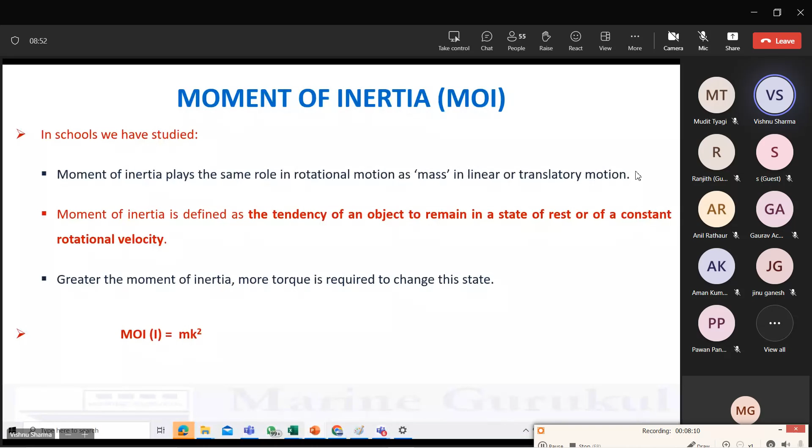Okay, so basically we have studied this moment of inertia in schools also. In schools, we studied moment of inertia as mk square, where k was the radius of gyration, if you remember. In all our working, we will represent moment of inertia mostly by capital I and sometimes by small i. So whether it is capital I or small i, both represent moment of inertia—don't get confused. But this was the moment of inertia of mass.

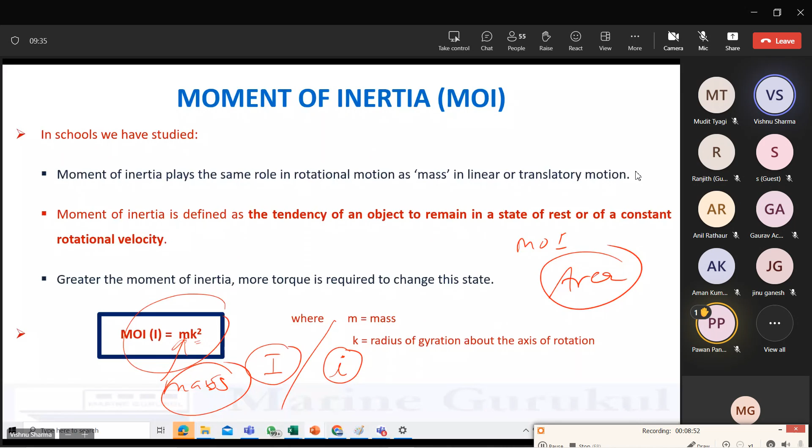In our topic today, we are not going to talk about moment of inertia of mass. We are going to talk about moment of inertia of area. As far as our context is concerned, moment of inertia refers to the second moment of area. First moment I explained a while back; second moment of area is referred to as moment of inertia as far as our topic is concerned. So you should not be confused—in school I studied mk square, why is m missing now? That was moment of inertia of mass; this is moment of inertia of area. That should put your doubt to rest.

Every time we talk of moment of inertia, please ask yourself two questions. Moment of inertia of which area are you talking about? Every time we can't write everything, but I must keep asking myself these questions. Moment of inertia of which area? Because unless I know which area I'm talking about, I can't talk about moment of inertia. Second, I must know: about which axis? If I do not know either of these two things, or both, I cannot get the moment of inertia, and I cannot answer any question related to it.

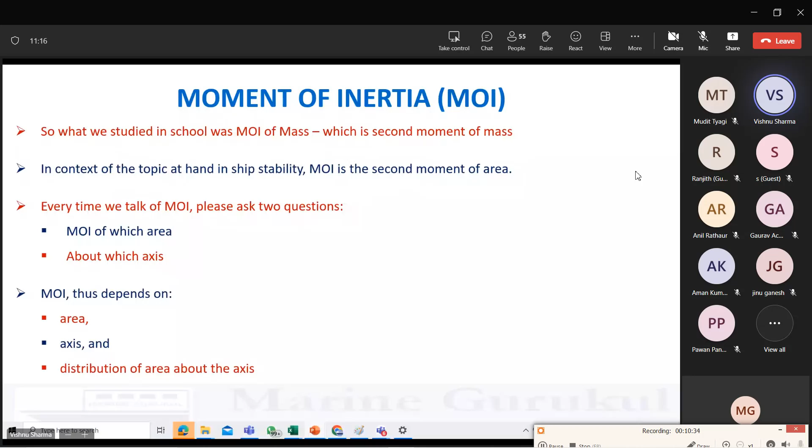Thus, moment of inertia will depend upon the area in question, the choice of the axis, and with respect to the axis, how the area is distributed. Okay, you may have this area—let us say this area is 10 square meters.

This area is also 10 square meters, but one is a square, the other is a rectangle. Let's say this is the axis about which I want the moment of inertia, y, for the area represented by the red one. Now I change the shape to a rectangle, retaining the area at 10 square meters. The axis is same, the amount of area is same, but the distribution of the area in the blue one is different from the distribution in the red one about y. Therefore, in both cases, moment of inertia shall be different.

And that is what I mean by the third point. Is the third point clear, guys? Distribution of area about the axis. Clear? Any questions until now? If anybody has any doubts, please clarify.

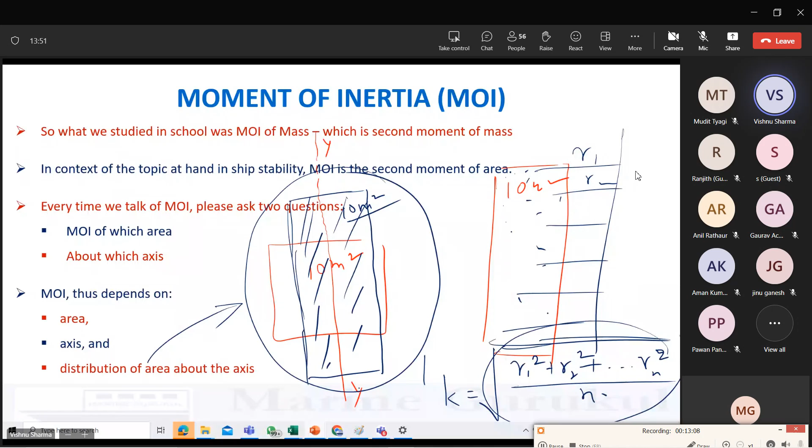Just to tell you, radius of gyration is not the distance of the centroid from the axis. That should not be in your mind. Is that clear? Okay, that is good enough. I can prove this to you, but there's no point, we don't have to spend time on that. As long as this expression gives you an idea that radius of gyration is not same as the distance of the geometric center from the axis, right?

Now we come to the regular geometric shapes, these formulae. You will automatically pick them up as you use them in the questions. Whatever PDF I sent you yesterday, you are free to refer to it while doing the questions. And if you don't learn them by the end of the assignment, please spend 15 minutes to learn the formulae if the need arises.

We need to recall the use of formulae for moment of inertia of regular geometric shapes, which we did in school, some of them we even derived. The regular geometric shapes we are going to use are rectangle, triangle, circle, semicircle, and quadrant, that is 1/4 of a circle. These are the shapes we are going to use in our working, and these are the formulae I sent you yesterday.

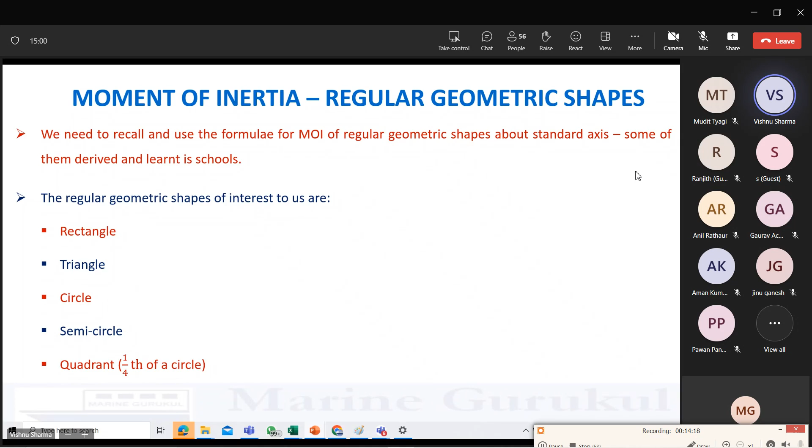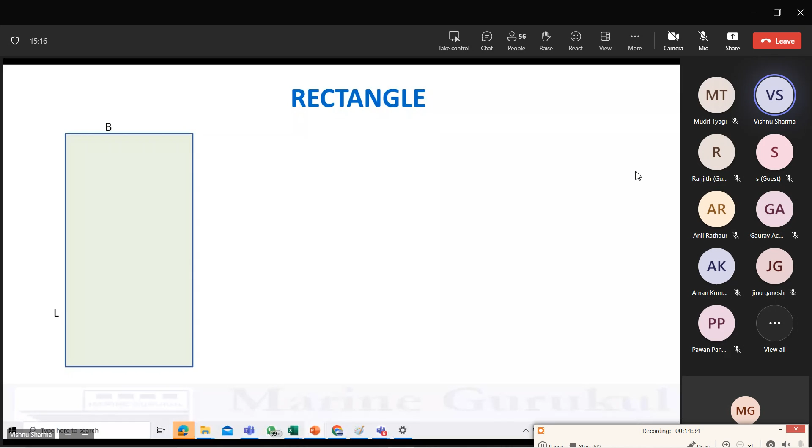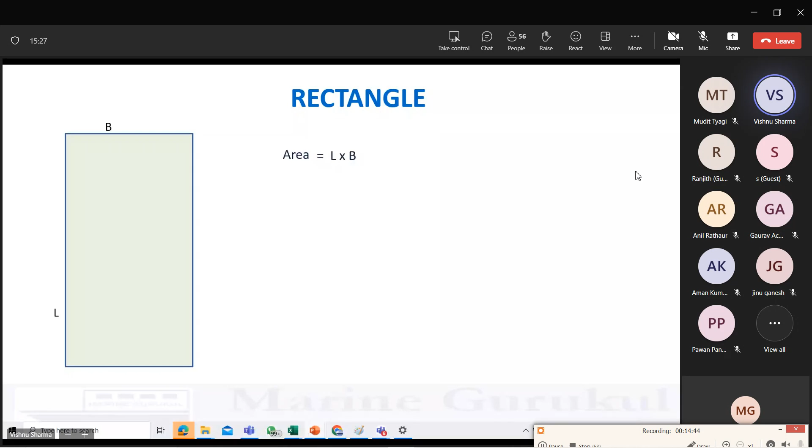Let's start with the rectangle. We know what a rectangle is, we don't have to spend time on that. Let the length of the rectangle be capital L and the breadth be capital B. First, we must know the formula for area: area of a rectangle is L into B. Then we identify its geometric center, the centroid. Centroid will be the intersection of the diagonals. This is one diagonal, this is the other diagonal, and where the two diagonals intersect is the geometric center of this rectangle.

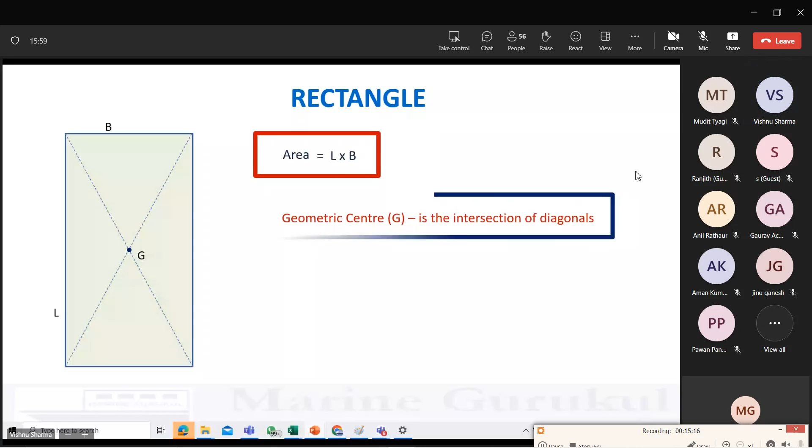Now we will learn some standard formulae. When I say standard formulae, please be careful to remember which shape, which axis. There are two standard formulae you need to learn for rectangle, for moment of inertia. One is about this axis, which I've called the x-axis. You can name it whatever you want. This axis passes through G, the geometric center, and is parallel to side L. So x-axis is an axis that passes through the geometric center of the rectangle and is parallel to the side L. The moment of inertia about the x-axis, represented as I-x-axis,

is given by this formula: L times B cubed, divided by 12. Length into cube of the breadth, divided by 12. See what I have written here, this represents the axis about which you're talking about the moment of inertia. Another axis we need to learn about is this one, YY. Now, I-YY will be B times L cubed, divided by 12.

How do you remember which side to cube? You cube the side which is cut by the axis. Here B was cut by the axis, so B cube. YY is cutting L, so it is L cube.

Now what is so special about X and YY? Both are passing through the geometric center. If they don't pass through the geometric center, these formulas will not be valid. So both of them pass through the geometric center and are parallel to one of the sides. X is parallel to length, YY is parallel to breadth, and you cube the side whichever is being cut by the axis.

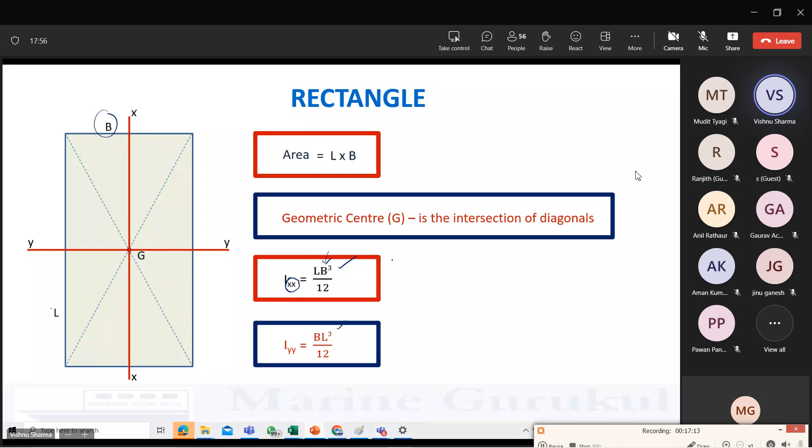This will help you in remembering which one to cube. Is that clear, guys? Yes, sir. Okay.

Next we go to triangle. Now before I start talking of triangle, I want to take a minute to explain something people usually make a mistake about. Guys, the triangle has three sides. And we know the area of the triangle is half base into height.

Now please understand that any of these three sides could be acting as a base. Then which height are we talking about? We are talking about the height which is corresponding to the base in question.

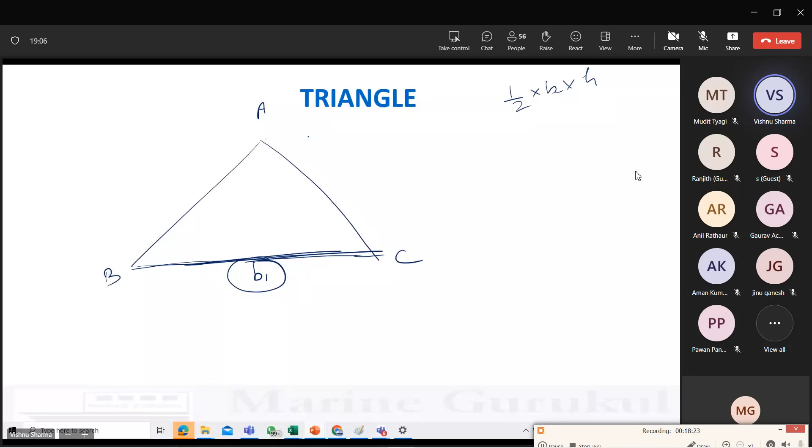For example, if somebody says I am taking this as the base, B1 as the base, then we go to the opposite vertex. Opposite vertex is A. We can draw a parallel side through it, parallel to the base. And the perpendicular distance between these two parallel sides is height 1. H1 corresponds to base 1.

In another scenario, I may be required to use another side as the base. Suppose I need to use this as the base, B2. Which is the vertex opposite to B2? Capital B. Through B, I draw a line parallel to base AC.

And then I drop a perpendicular wherever you can drop. You can measure here also, it doesn't make a difference. This is H2, so height 2 corresponds to base 2. So if you are calculating area, if you are taking B1, you will multiply by H1. If you are taking B2, you will multiply by H2.

And if you're taking the third side as the base, you could be needing any one of them to be taken. So please don't get confused when we start solving questions. If you want to take this as the base, then the perpendicular distance from here, this is height 3.

So is the concept of base and height of a triangle clear to everybody, or does anybody have any question on that? Clear, sir. Okay, so I'll clear this and we go to triangle.

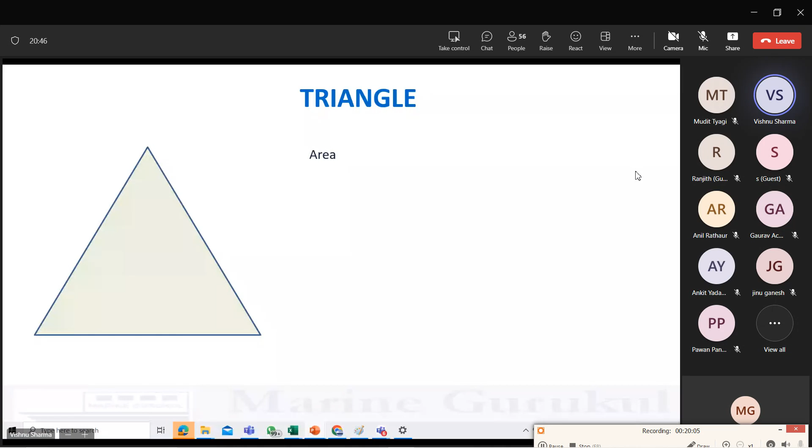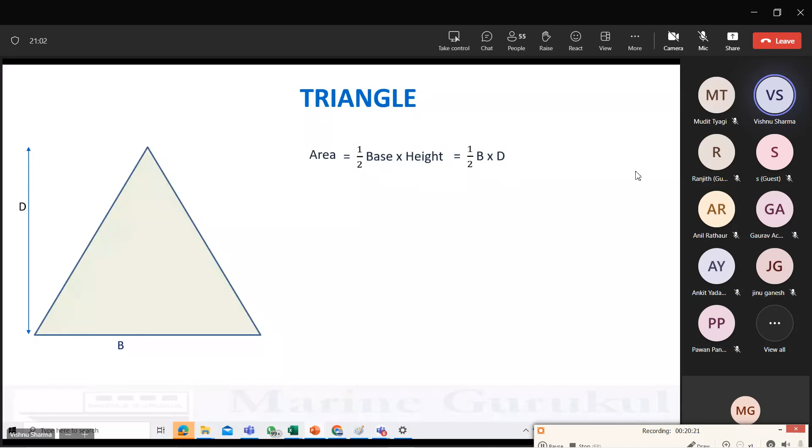Okay, this is the triangle we are talking about. Area of the triangle is half base into height. Now here I have taken B as the base and the height I'm taking as capital D, so it will be half base into the height D. Caution: height being corresponding to the side chosen as the base, which I just explained a while back.

Please make sure that you take appropriate height, appropriate to the base in question. So you cannot just mix it up.

Geometric center of a triangle is the intersection of its medians. What is a median? Median is a straight line joining one vertex to the midpoint of the opposite side. That means if you take A as the vertex, the opposite side is this one, you take its midpoint, you join it with a straight line, that's a median.

Okay, so you draw the three medians. This is one median, this is the second median, and this is the third median. Where the medians intersect, that point is the geometric center of the triangle.

And also, the distance of the geometric center of the triangle is 1/3 of the height from the base and 2/3 of the height from the vertex. So this will be 1/3 D and this will be 2/3 D. Please don't get confused and reverse them.

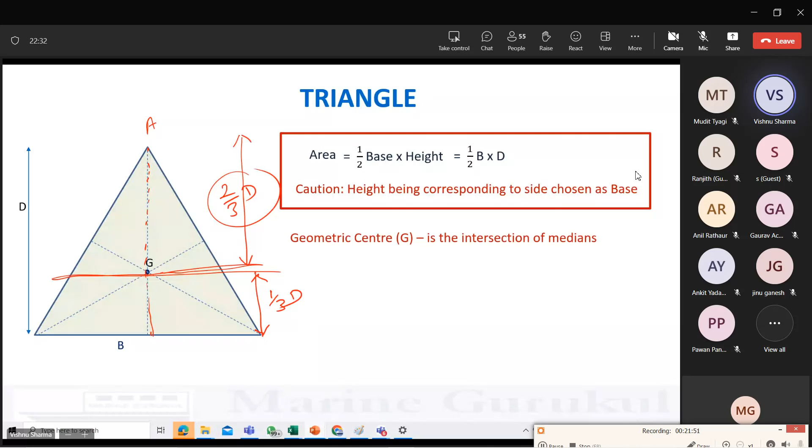The distance of the centroid of a triangle is 1/3 of the height from the base and 2/3 of the height from the vertex. Is that clear? Yes, sir. If the base was different, then it will be 1/3 of the corresponding height and 2/3 of the corresponding height. So you have to be careful between base and height.

Now, in this case, we will learn two formulae. Why now you'll say, sir, why are you learning two formulae for a triangle? Why not only one? Because our questions use them. If you learn one formula extra, that will help us save time when we calculate and do the questions.

So the axis, we need to know about this. Guys, what is so special about the axis that I have drawn, XX? It is passing through G and parallel to base B. XX is an axis passing through the centroid and parallel to base B. And the formula for moment of inertia about this is BD cube upon 36.

B is the base, D is the height. BD cube upon 36 is the formula.

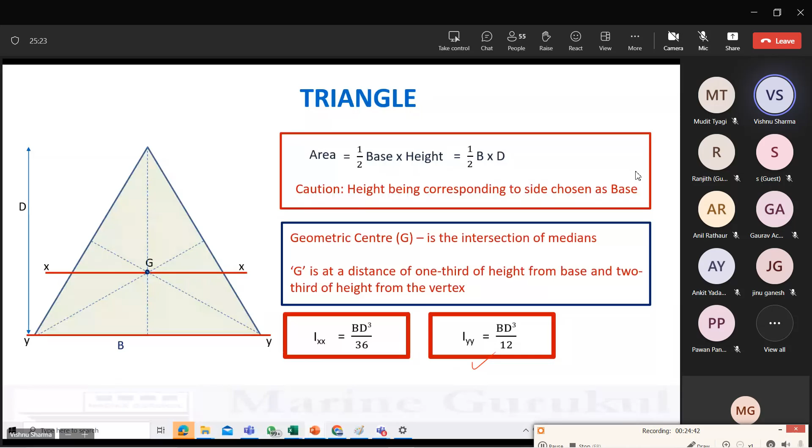Okay, the third we come to is a circle. We all know what a circle is. It has a circumference, it has a diameter, it has a radius, and we know where the center of the circle is. The center - this is the diameter of the circle. Half of it is the radius. All of you know it. And area is pi r square.

In stability, when we take pi, we'll take it as 22/7. We'll not take it as 3.14. We'll take it as 22/7.

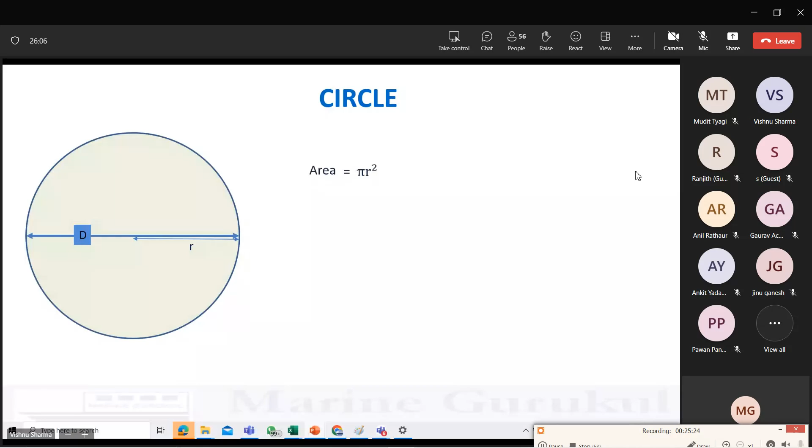Where is the geometric center of a circle? Where all the diameters intersect. If I draw one more diagonal, or another diagonal slanting, they will all meet at this point. That is the center of the circle, G, geometric center, right?

Now we learn about moment of inertia of a circle about this axis, the x-axis. About x-axis, what happens? One semicircle is on one side, another semicircle is on the other side. When you take y, again the area distribution is similar. You have one semicircle on one side of y, another semicircle on the other side.

If I take any other diameter, suppose I take this diameter ZZ. Even for ZZ, on one side you have an area which is a semicircle, and on the other side another semicircle. So whether it is XX, YY, or ZZ, the distribution of the area does not change.

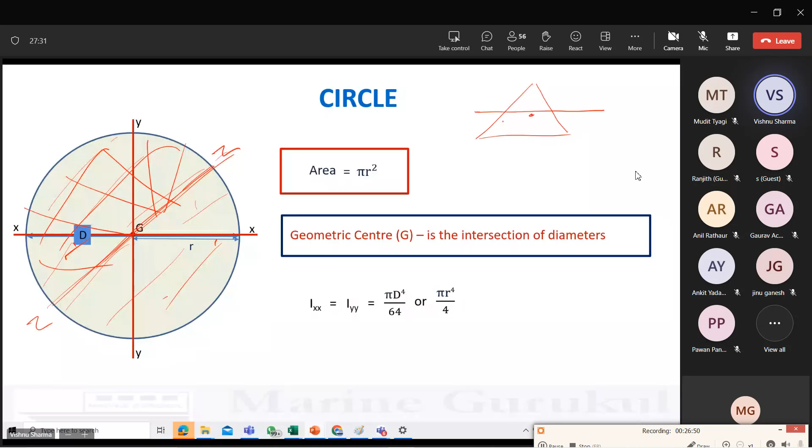Compare it with the triangle a while back. When you took the axis XX, some area was above it, some was below it. When you took YY, everything was on one side of YY. So the distribution changed, and the formula changed. But between XX, YY, and ZZ, the distribution is not changing.

Therefore, it will all be pi d^4/64. If you put d as 2r, it will reduce to pi r^4/4. If both are same, it doesn't matter. So basically, this will be the formula about any diameter - it doesn't make a difference which diameter you are talking about.

So is the formula for circle clear now? But for any diameter of the circle, the formula will be the same. Clear? Clear, guys? Yes, sir. Yes, sir. Yes, sir.

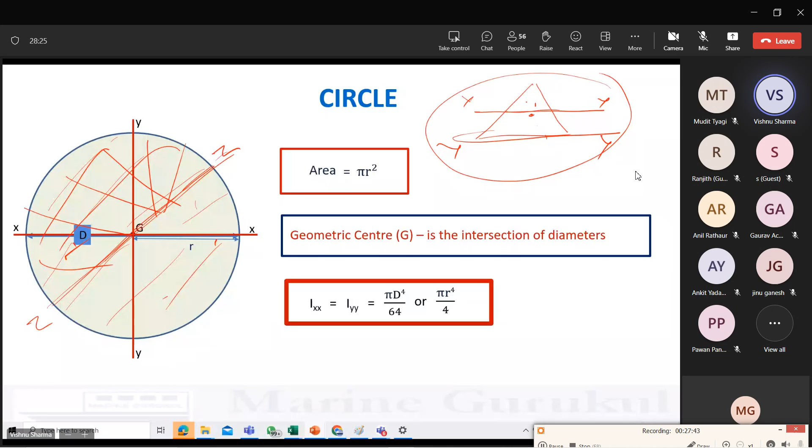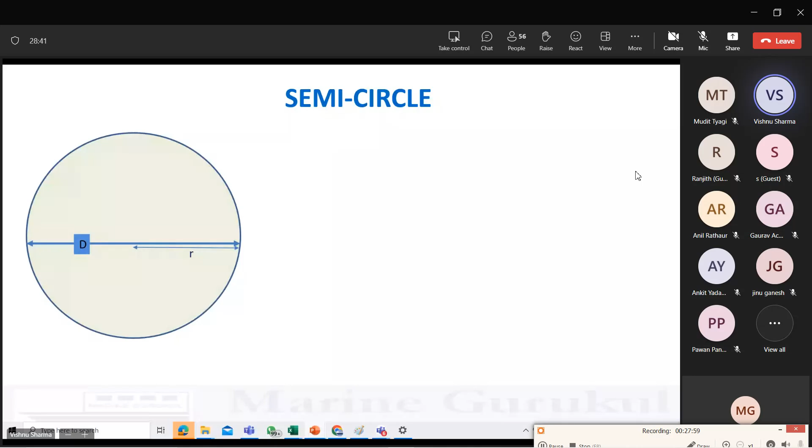Okay, then we come to semicircle. We have just studied about this full circle. We know what was its area, where the geometric center was, and everything. But now, if I remove one half of it, what am I left with? I am now left with a semicircle.

Obviously, the geometric center will not be on the diameter now. But all of you would agree that the geometric center would be on this radius, yes or no? Why? Because you have identical areas on each side of it. Do you agree the geometric center of this semicircle will be on this red line? Yes, sir. This is the radius perpendicular to the diameter of the semicircle, correct?

Okay, area of this will be half of the area of a circle. What was the area of a circle? Pi r square. This will become pi r square by 2.

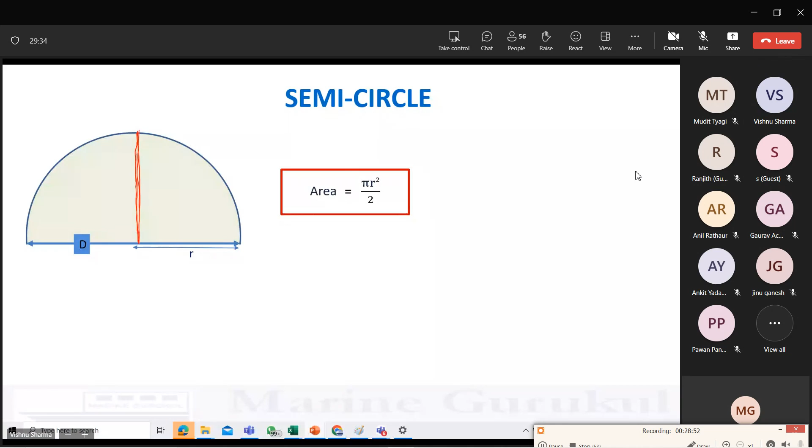Where will be the centroid of it? It will be on a radius perpendicular to the given diameter.

Now, where will be the geometric center? On this red line, the geometric center will be closer to the diameter than the circumference. Why? Because on top, the width is reducing with the curvature. Because of the curve, the width of the area is reducing. The geometric center of this semicircle would be somewhere here.

And this distance is what is given as 4r by 3 pi. That is the distance of the centroid of the semicircle from the diameter. You'll have to learn this formula, 4r by 3 pi.

Let me clear my diagram. This distance is 4r by 3 pi. So if you know the radius, you can get this distance.

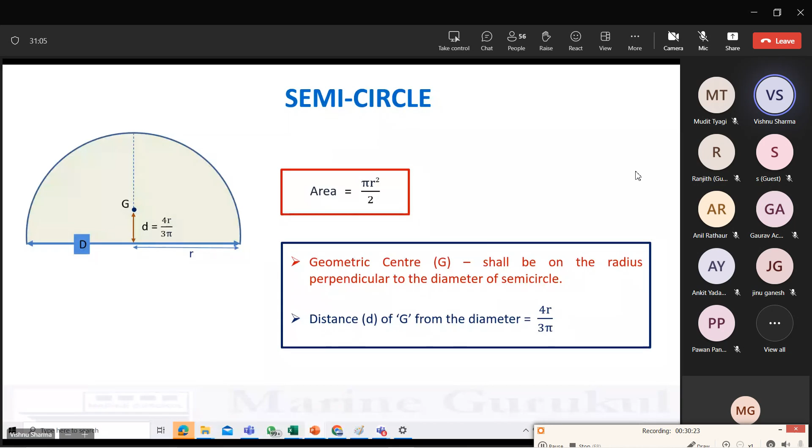Now, which axis are we going to study the moment of inertia about? Again, we'll study about two axes to facilitate simple calculation. One axis every time will be passing through the geometric center, undoubtedly. So one would be through the geometric center, and the second one would be this one, YY.

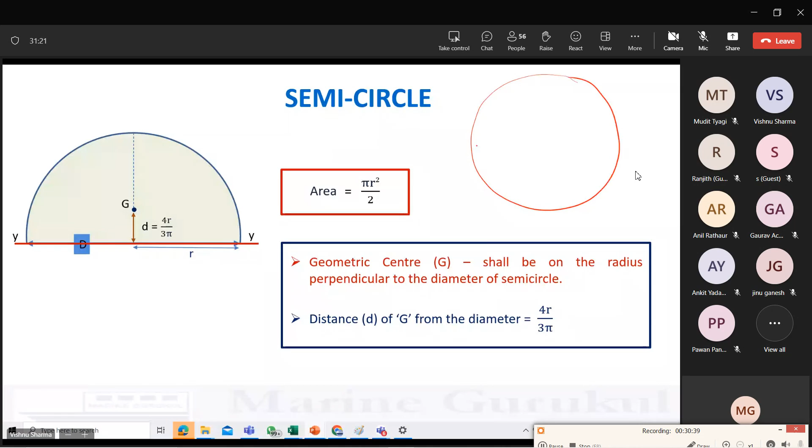Recall the circle a while back. This was the circle. This was the diameter of the circle. And if I take the axis about the diameter, YY, then for the full circle, it was pi d^4 upon 64, or pi r^4 upon 4. This was for the full circle, correct?

Yes or no? Yes, sir. Yes, sir. What now?

I'm keeping the axis same, YY. What I'm doing is removing half of the area. If I remove half the area, the axis remains the same, the distribution of the other half has remained unchanged. So this moment of inertia will become half of it. That's how you can remember it.

This will become pi d^4 upon 128, double of 64. And this will become pi r^4 upon 8. So about YY, it will be straight half of what it was for the circle: pi d^4 upon 128 and pi r^4 upon 8.

Will you be able to remember this now through this method? Because the axis has remained unchanged, only half the area has disappeared, so the moment of inertia will just become half. So you don't have to learn this formula. As long as you learn for the circle and make it half, your job is done. You don't have to remember all the formulas, otherwise there will be confusion.

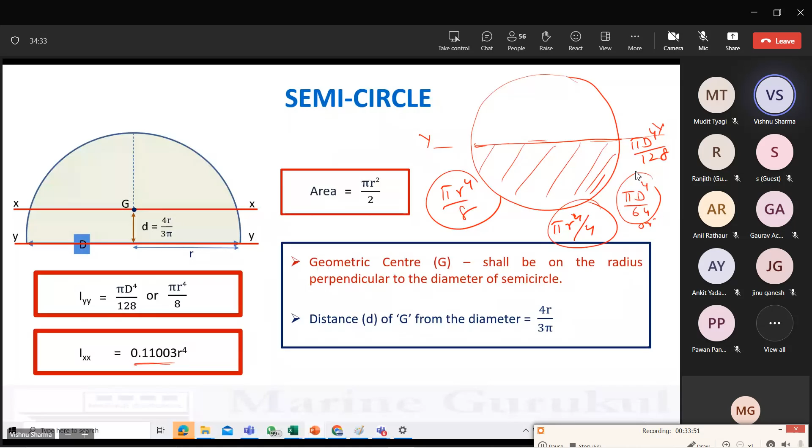Now we go to the last set of formulae, that is the quadrant. We started with the circle. We lost half of it. It became the semicircle. Then we lose further. Here was the geometric center of the semicircle.

Now tell me before I go further, if this was the geometric center of the semicircle, then what do you think of area A1 and A2? Do you agree that the geometric center of A1 and A2 would be on this line somewhere? Then only the combined geometric center would come here.

Yes or no, beta? Yes. The geometric center of A1 and A2 have to be on this line, let us say AB, for the geometric center of the combined area to be at G on this line. Yes or no? Yes, sir. Okay. Yes, sir.

Exactly the same way, if I take this semicircle—which semicircle? I take this semicircle now—where will be the geometric center of this red semicircle that I have drawn? It will be here. Yes or no, beta? Correct?

Yes sir, this will be the geometric center of the red semicircle. At what distance? 4r by 3 pi. This is 4r by 3 pi, and this is also 4r by 3 pi. We just learned this for the semicircle.

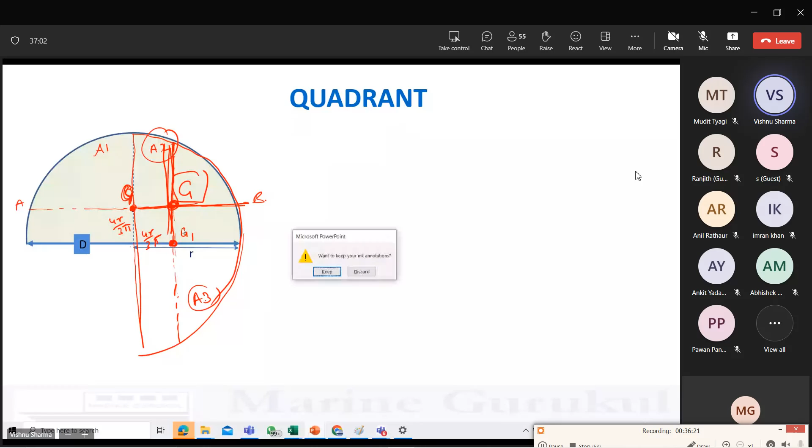Yes, correct sir. And it will be at a distance of 4r by 3 pi from each of the radii. So anyway, don't worry, you can learn it if there's a problem, and if you can understand it, it will simplify things. That's all.

So we started with a circle. We had this semicircle, we had the G here, then we had this formula, all we had. Now we knock off another half.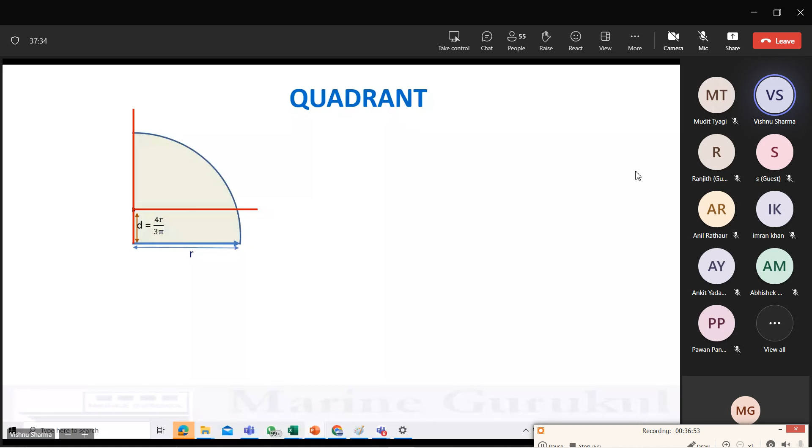So what will be the area of the quadrant? It will be 1/4 of a circle. What was for the circle? Pi r square. What will be the area for the quadrant? Pi r square by 4.

Where will be the centroid of this quadrant? I just explained to you, the geometric center shall be at the same distance from each radii, that is 4r by 3 pi. That means the geometric center would be here. I just explained to you why it will be here.

Now which are the axes we are going to take the moment of inertia about? See, whether I take the moment of inertia about this axis ZZ, or I take about AA - I'm sure, firstly tell me, do you agree moment of inertia of this quadrant about AA would be same as moment of inertia about ZZ? Is that going to be yes or no?

Yes or no? Because area is distributed the same way about both. Yes sir, same. Correct, so firstly you agree they are equal.

Okay, fantastic. Now ZZ is the center diameter of the full circle. What is IZZ of the circle? IZZ of the circle was pi d4 upon 64, or pi r4 upon 4.

I have removed this half. What have I kept? I have kept the axis ZZ only, but I have made the area 1/4. So what will happen? This will also become 1/4. What will it be? Pi d4 upon 256, or pi r4 upon 16.

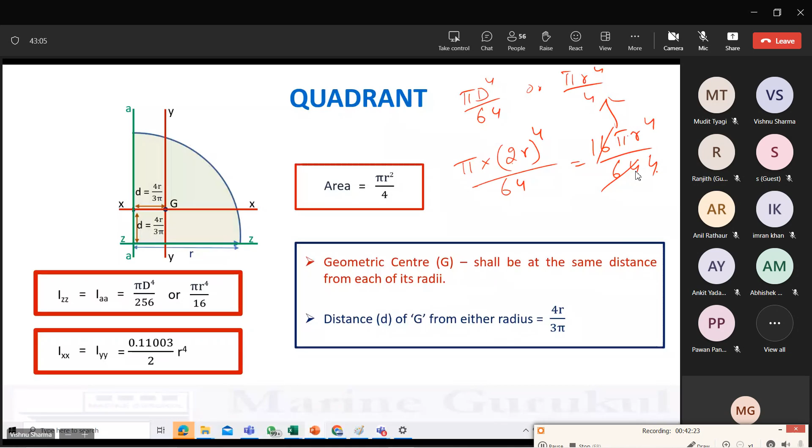Okay, guys, before I close the slide, we have to learn the theorem of parallel axis, which will be extensively used in our questions and applications also.

Now, suppose there is any area. I'm just making a rectangle for the sake of simple drawing. Otherwise it can be any shape, irregular, regular, whatever it is. Okay, let us say we have this rectangle or whatever it is. Suppose somebody says, I want the moment of inertia of this rectangle about this axis. Now this does not have to be always outside the shape. It can be inside the shape also. The Z can be here also, guys. So don't, I'm keeping it out so that the explanation becomes clear.

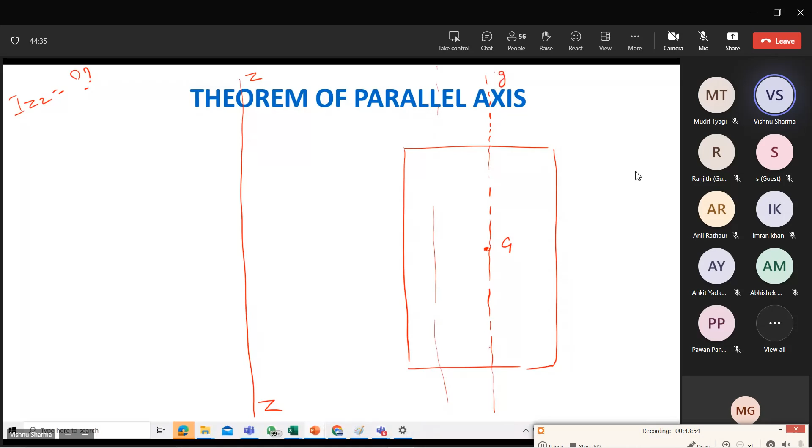Now what is required is IZZ. So what we can explore is, we identify the geometric center of the area, which in this case will be here. To the geometric center, we draw an axis parallel to the given axis. That is, I draw one parallel to ZZ. Let's say I call it GG, passing through the geometric center. Then the perpendicular distance between these two parallel lines, we call it D. And this area in question, we call it A.

Now, as per theorem of parallel axis of moment of inertia, IZZ will be equal to IGG plus A into D square. This is the expression for theorem of parallel axis. Please take it down. IZZ, and all these ZZ and GG is with reference to the diagram, obviously guys. IZZ, and how are IZZ and GG connected? They are parallel to each other. GG is passing through the geometric center. ZZ is not passing through the geometric center, right? So IZZ is equal to IGG plus the area into square of perpendicular distance between the parallel axes. So this is the expression for theorem of parallel axes.

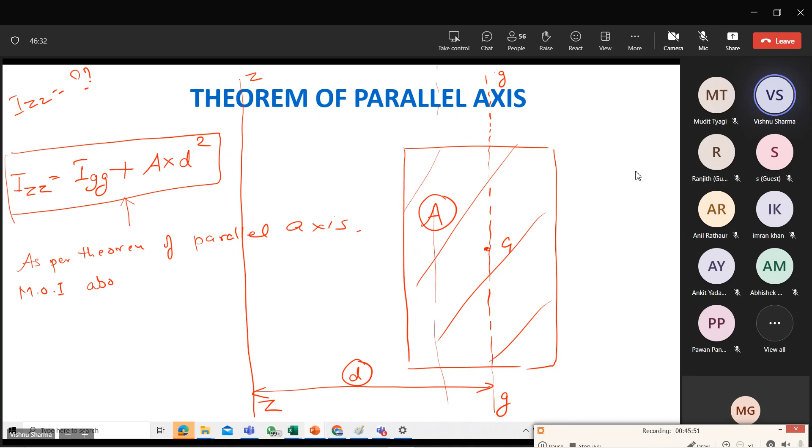When I express this in words, it becomes the so-called definition of theorem of parallel axes. This question can come in theory also: describe or explain theorem of parallel axis. So you can take an example like this, explain it, and then you can define it by saying, as per theorem of parallel axis, moment of inertia about any given axis is the sum of MOI about a parallel axis drawn through the geometric center, parallel axis through the geometric center. And so why and? Because we are saying sum of what? One is the MOI about a parallel axis through the GC, and what?

And the product of area with square of perpendicular distance between the axes, between the two axes. Guys, I've done nothing, I've just given words to this expression. That's all. You can give your own words, no issues, as long as technically you don't alter the meaning of the thing.

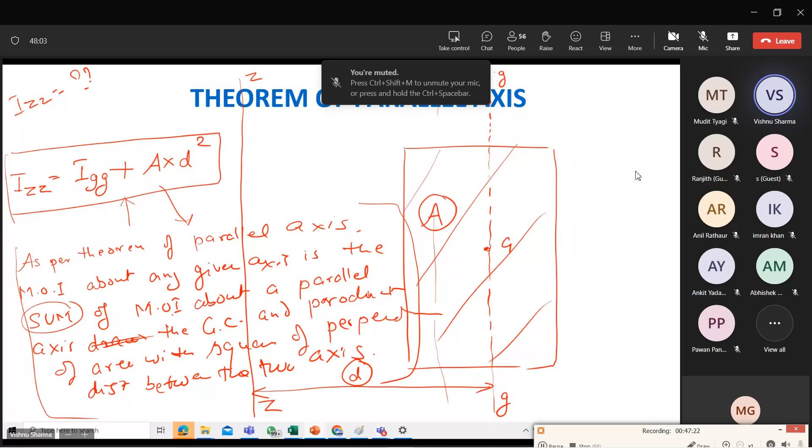So, is the theorem of parallel axis clear to everybody? Please have a good look at it. You can, whatever you want to take down, you can take down. Theorem of parallel axis: as per theorem of parallel axis, the moment of inertia about any axis is equal to sum of the moment of inertia about a parallel axis through the geometric center and the product of the area with the square of the perpendicular distance between the two axes.

Okay guys, this we'll be extensively using. Remember that between these two, if you see, it is IGG plus AD square. Please remember that. Don't make it IGG is equal to IZZ plus AD square. No, it is IZZ is equal to IGG plus AD square. Am I clear, guys?

Theorem of parallel axis is clear. Anybody has any questions on this, beta? Yes, sir. No, sir. No, okay, very good.

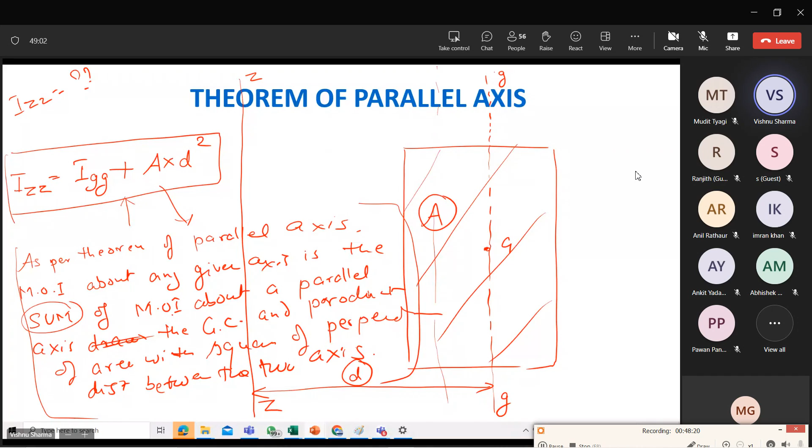So we come to end of this small presentation, and now we'll go on to the first application. Do you want a 3 to 5 minutes break, or shall I start? I'm okay to start, I have no issues. Start, sir. Start. Start. Okay, very good. No problem, good.

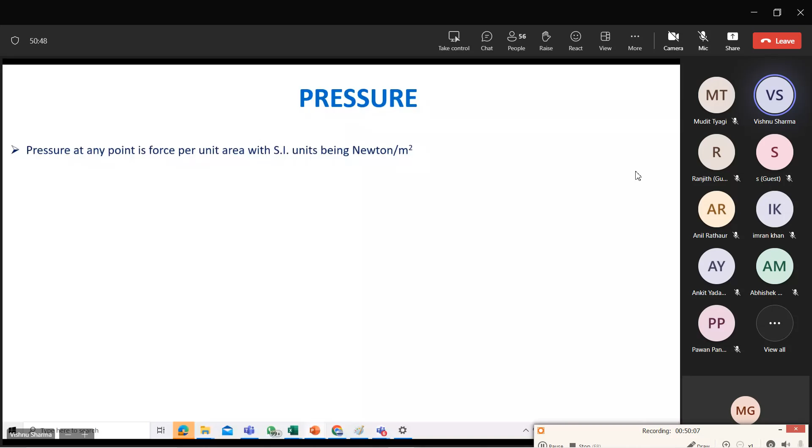I'll show it on the screen also. Pressure at any point is the force per unit area, with SI units being Newton per meter square. As regards ship stability, we limit our scope to pressure exerted by a column of liquid at any point below its surface. The pressure due to a column of liquid at any point below the surface should technically be equal to depth of the point multiplied by density multiplied by acceleration due to gravity, h rho g.

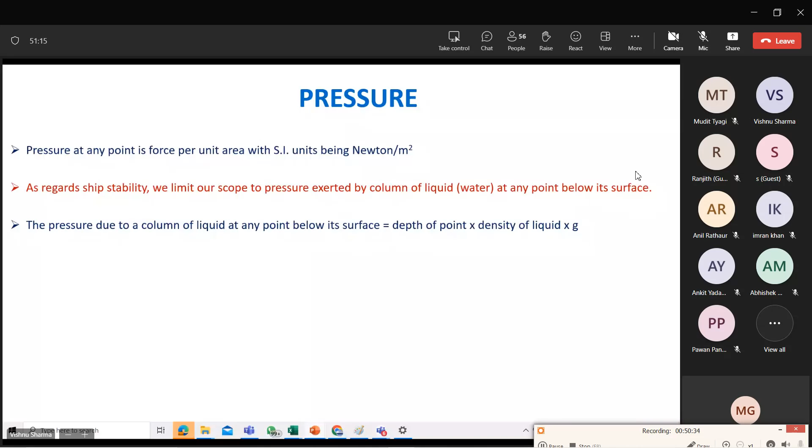However, in ship stability, since my ship is always on the surface of the earth and g remains practically constant, only to keep our calculation simple, g has just been kept aside for the sake of convenience. Okay, I have not changed the meaning of pressure, only g has been kept aside for the sake of convenience, intentionally left out of the calculations for the sake of convenience. And therefore, in ship stability, most often we will say pressure is equal to depth of the point below the liquid surface in meters multiplied by the density in tons per cubic meter, and that will give us the pressure in tons per meter square. Any questions on this slide, guys? Or please don't forget this, when need arises we'll have to use it.

Sir, this depth will be center of gravity of the liquid surface, no sir? No, we are talking of a pressure at a point. Pressure can be at any point, na beta. Pressure, or whatever is the immersed area, the pressure at different points will be different, right? I got it sir, got it sir. Pressure at different points will be different.

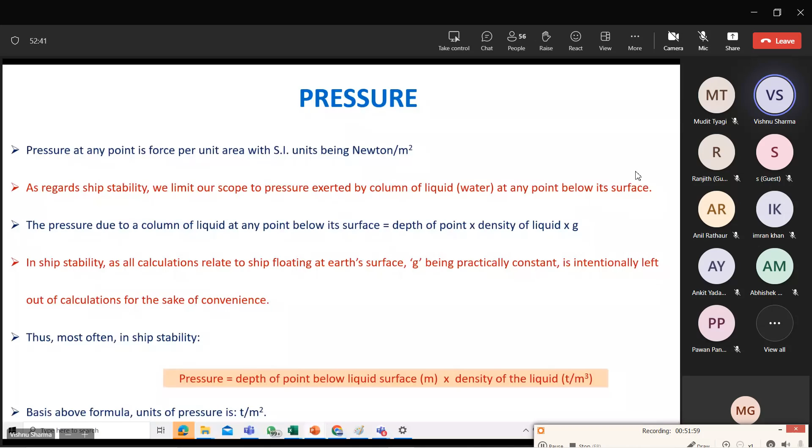Okay, any questions on pressure, guys? None, okay. The second term you learned there was thrust. Thrust is the force exerted on a surface. As regards ship stability, we limit our scope to thrust, that is force exerted by the liquid on an immersed surface.

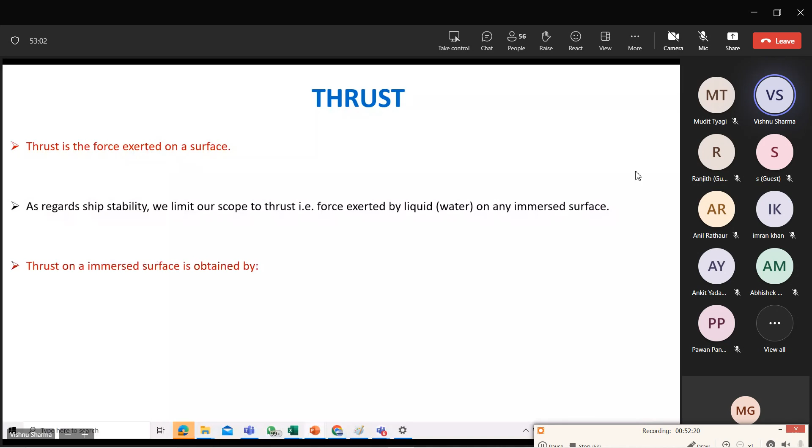Thrust on an immersed surface is obtained by multiplying the pressure at the CG, this is what you're trying to say beta, multiplied with the area. So this is the thrust. Pressure at the geometric center of the immersed area. Please pay attention to the word immersed area. Whose geometric center? Geometric center of the immersed area.

And multiplied by the immersed area will give you the thrust. What is the pressure at the geometric center? Pressure at the geometric center will be the depth of the GC multiplied by density. So this is the pressure, this much is actually this part of the expression, and this is the immersed area. And so thrust will be in tons. Any questions on this slide, guys? Please don't forget it, don't forget the word immersed.

Any questions on pressure and thrust, guys? If anybody has anything in mind to basically seek clarification about. Done? Good. Okay, good.

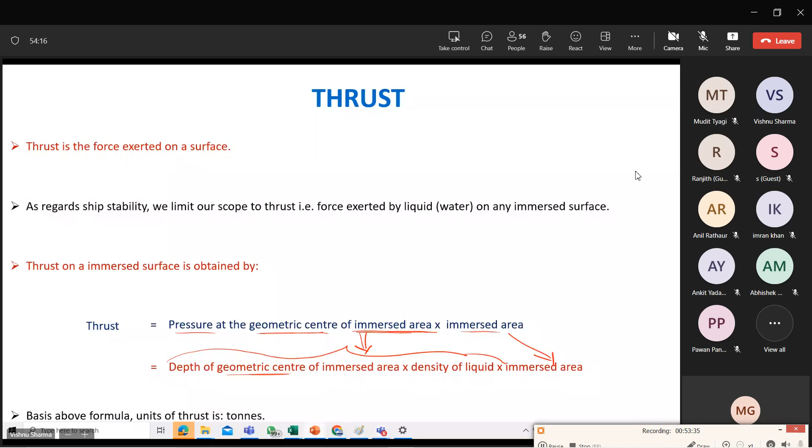Now we come to the first application of moment of inertia. That is center of pressure. We'll call it COP. Okay, what is it, beta?

See, weight is a force. It can be assumed to be acting through the center of that force called the center of gravity. Buoyancy is a force, it can be assumed to be acting through its center called the center of buoyancy. Correct? Likewise, we just said thrust is a force. Acting on what? Acting on a certain area. Thrust is a force acting on the immersed area.

So if thrust is a force, weight was a force, buoyancy was a force, if weight and buoyancy can be expressed to be acting through their respective centers, then likewise, if the full thrust is to be taken into account, somebody has to say which is the point through which entire thrust can be assumed to be acting through. That point is called the COP or center of pressure. Clear, guys? It is the point through which the entire thrust can be assumed to be acting through.

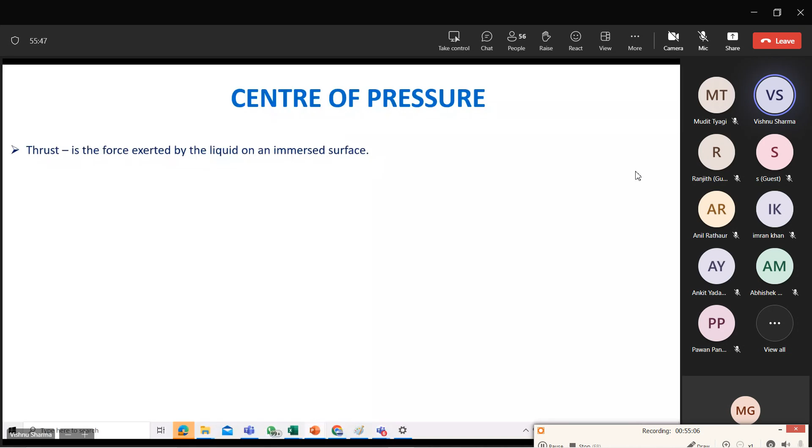So thrust is the force exerted by the liquid on the immersed surface, we just said a while back. If the thrust exerted on a surface is to be considered as one entity, one force, it can be assumed as one force acting through the center of the force called COP. So COP is called center of pressure, but it's actually the center of force of thrust. It's not the center where the pressure can be acting. COP's analogy with other centers of forces like COG and COB, I just told you, so you can connect with that better now.

Now, to get the COP, there is a formula. The derivation of the formula is not part of our syllabus. It's given in Derrett's if anybody wants to look at it at a later time. Ship Stability by Derrett has the derivation for the formula for COP, just for your information in case you want to have it at a later stage. What you need to do now is just learn the formula.

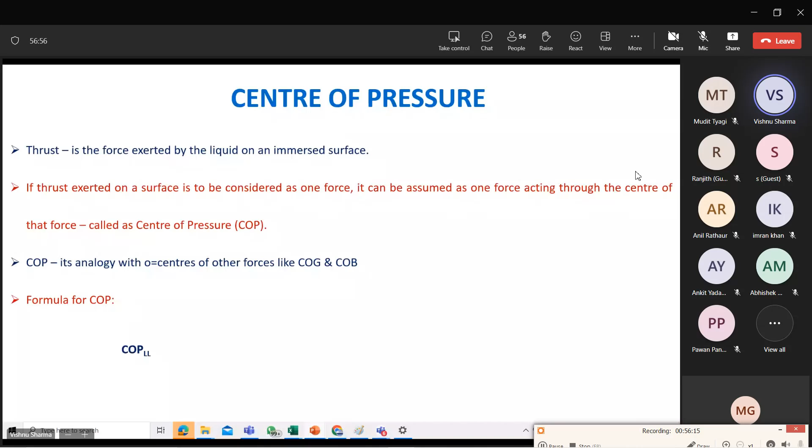What is the formula? COP_LL is equal to I_LL upon area into D_LL. This LL is in subscript, beta. Okay, now please remember this. So what is this formula? This formula is COP_LL equals I_LL upon area into D_LL.

Now what does this COP_LL mean? This means distance of COP from liquid level, LL is liquid level. So this formula will give you the distance always from liquid level, nowhere else. If the question wants the answer not from liquid level but from top of the bulkhead or bottom of the bulkhead, you'll have to do the adjustment at the end. The formula cannot be modified to give you distance from base or distance from bulkhead top. The formula will always give you distance of the COP from liquid level. Is that clear, beta?

Clear, guys? Yes sir, yes sir. And what is the formula?

I_LL. Now understand what is I_LL. This is the moment of inertia. Of what? Of immersed area. Then another thing I said was about which axis? About LL, liquid level. So I_LL is the moment of inertia of the immersed area about liquid level.

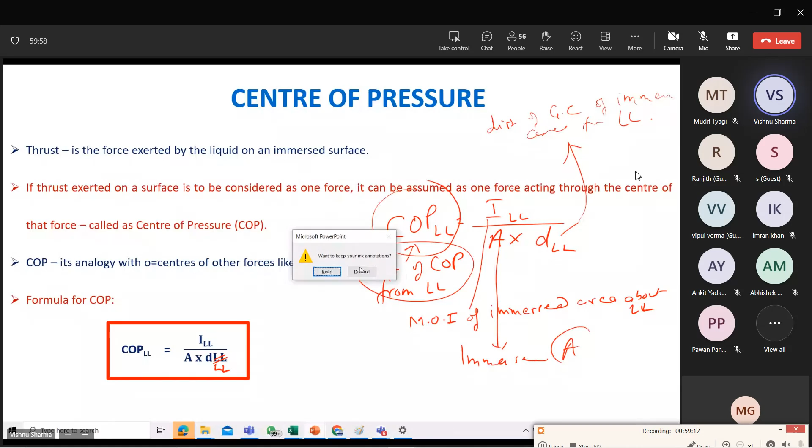Is the formula clear to everybody, beta? Or any clarifications required? Can you please repeat the last line, sir? Which one, beta? Say again. Which one you want me to repeat? Sir, distance of the, how we will get the distance of the liquid level, sir? We will see in the question, but you need to get these three things to close the question.

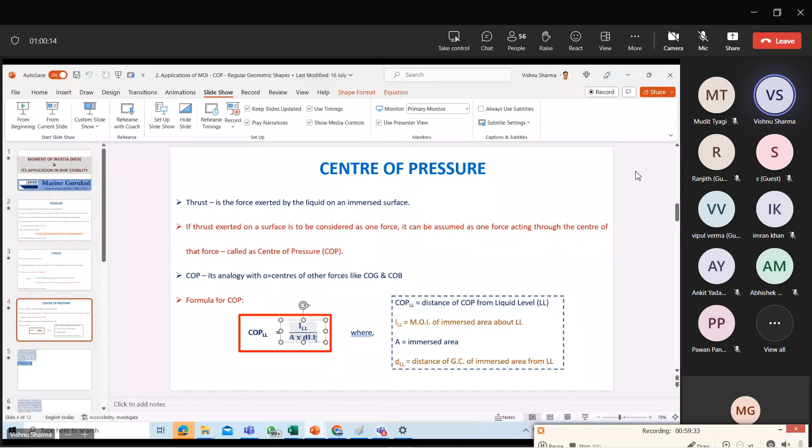Correct, beta? Okay sir. And sir, the area will be the same, just a triangle? Immersed area will be immersed area, beta. That's what I said. You identify the immersed area. Correct?

Once you identify the immersed area, then you will be able to identify its geometric center. You'll be able to identify liquid level. You will then be able to get the moment of inertia.

So what will be your job in each question? You'll have to draw the appropriate diagram, because the diagram will be the key to the questions. It is the diagram which is going to lead you to the solution. Is that clear, bete?

Thik hai bachchon? Don't worry, don't worry. Once I start doing the questions, I'll ask you, what's your name, beta? I'll ask you the questions then. Vipul, don't worry, I'll ask you the question in the next question itself. Guys, is each constituent of the formula clear to you? Yes or no? Yes, sir. Yes, sir. Yeah.

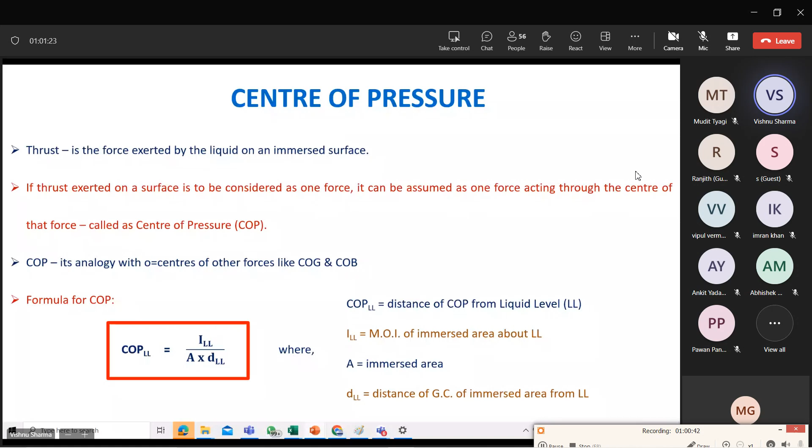Now we'll take the questions. We'll start with the simple ones and we'll go to the difficult ones.

First one: transverse bulkhead of a tank is 10 meters wide. It's a rectangular bulkhead. The shape is somewhere I missed out in writing, I think. It's a rectangular transverse bulkhead of a tank, so please, I stand corrected, the shape has to be mentioned. It's a rectangular transverse bulkhead of a tank, 10 meters wide and 8 meters high. Find the thrust on the bulkhead and the distance of the COP from the base of the bulkhead if the tank contains seawater to a head of 3 meters and the density of the water is 1.010.

Now, I will be talking to you, but I always tell people you talk to yourself when you solve, and talk exactly the way I'm talking to you. If you learn this practice, you will never get confused. So pay attention to what I'm telling you, and in fact, you should be talking that to yourself when you solve.

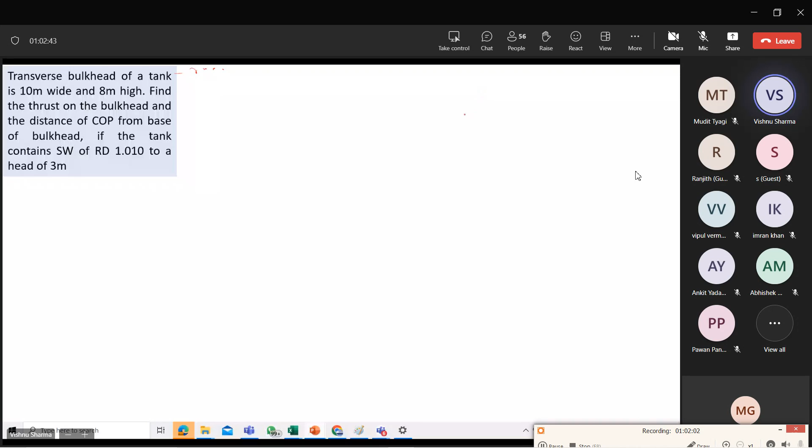First, I draw the diagram. If anybody has any questions, I'll come back to you, don't worry. So first step is I draw the diagram. It's 10 meters wide, 8 meters high.

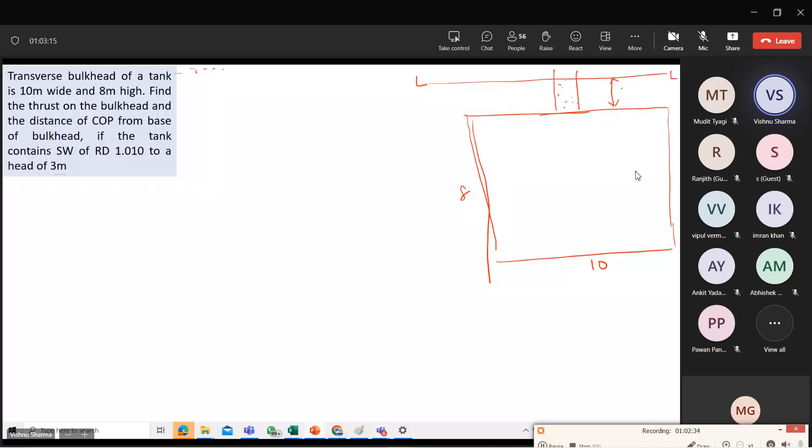It contains seawater to a head of 3 meters. Head of 3 meters means the water is into the sounding pipes and air pipes, 3 meters above the top of the tank. So that is the liquid level. This is 3 meters of head, meaning the water is in the sounding and air pipes, 3 meters above the top of the tank. That is what is meant by 3 meters of head.

Once the water is in the air pipe and sounding pipe, that means the tank is full. If the tank is full, this entire area is the immersed area. I have identified the immersed area, because if the tank is full, the entire area is the immersed area.

Then I'm looking at the shape of the immersed area. It's a rectangle. We just learned what is the geometric center: it is the intersection of the diagonals. So here is the geometric center of the rectangle.

What is the distance of this geometric center, DLL, distance of the geometric center from liquid level? This is 1/4... half of the height, 4 meters plus 3 meters, that is 7 meters. I'll come to you for doubts, don't worry.

So I have DLL, I know the area will be length into breadth. Now I need to get the moment of inertia of the immersed area about liquid level. So first we have to get the thrust, let's get the thrust first.

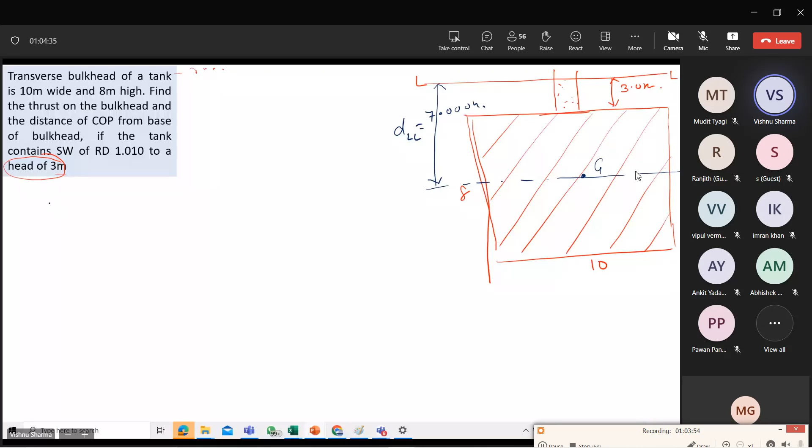Thrust: I am not going to fill up half the page calculating pressure separately, thrust separately, we don't have that much time. I said thrust is the pressure at the CG, pressure at G. Pressure at G will be DLL into the density of water. This is the pressure at G, multiplied by the area, 10 into 8. This will be the thrust in tons. Whatever it comes, I'm going to leave it as it is.

Second, I have to calculate the COP, but he wants COP from where? He wants from base, but my formula does not give me from base. My formula will give me from wherever it is giving, that's all. So my formula is going to give me the distance of the COP from liquid level.

The formula is ILL upon A into DLL. A I have, DLL I have. I don't have ILL. I look at the diagram.

Now, is LL a standard axis for rectangle? The standard axis for rectangle, what we did today, were both passing through G. Unfortunately, LL does not pass through G. Therefore, I cannot use those formulae directly that we learned today.

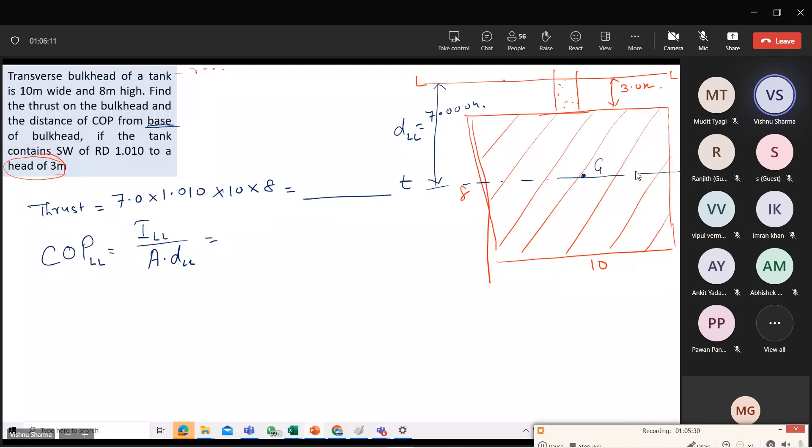What I now explore is the use of the theorem of parallel axis. What do I do? Through the geometric center, I draw an axis parallel to LL. I call it GG.

And now, yes, I can get ILL through the theorem of parallel axis. I simply apply the theorem of parallel axis for ILL, which will be equal to IGG plus A into D squared. Now, what is the D between the two parallel axes? That is DLL, DLL square divided by A into DLL.

Now, is GG a standard axis? Yes, GG is a standard axis for the rectangle. Which side is it cutting? It's cutting 8 meters, so it will be 10 into 8 cube upon 12 for IGG. Plus area is 10 into 8. DLL is 7, divided by area of 80 into DLL of 7. This will give me

COP/LL in meters. Okay, but I want to give COP from base. Now COP from base, if you see, I have got from here, that is the liquid level. I want from here the base. The total sounding is 8 plus 3, 11 meters. So 11 meters of sounding minus COP/LL will give me the answer from base.

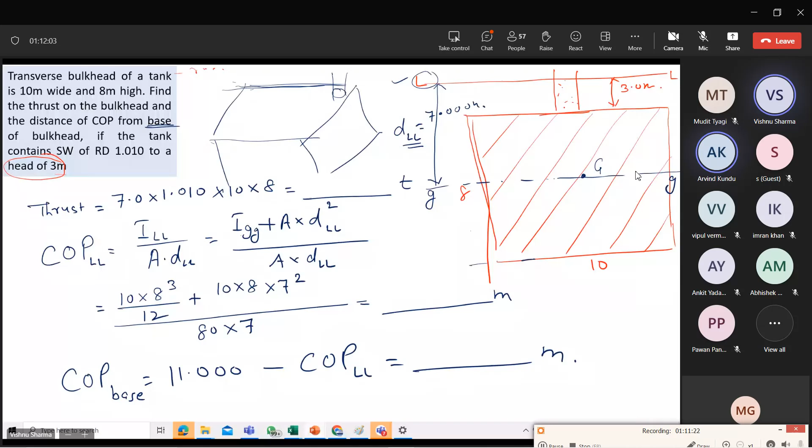See this second diagram which I made now, is it clear? This is the sounding pipe, and here is the bulkhead. Let's say this is the bulkhead you are talking about. Sounding pipe is not part of the bulkhead, nor is the air pipe. Any more questions on this, guys?

These are the answers. Sir, you can close out these answers, calculate and close out the question, or you can calculate by yourself afterwards. But if you want to close it now, you can close it now.

Sir, one question regarding the DLL. So why are we including the sounding pipe then, if we are not including the area? You're mixing up two issues. Why I said sounding pipe area is not to be included is because the question says thrust on the bulkhead, and the surface area of the sounding pipe is not part of the bulkhead. That was my answer, correct? Do you agree with that?

Yes, sir. Okay, depth of the geometric center from the liquid level in the compartment - I answered that a while back. Is the water in the air pipe part of the tank? Yes or no? Yes, sir, to the tank, yes.

If the liquid belongs to the tank, then wherever is the surface of the liquid, that is the surface of the liquid level. Correct? Yes or no? Yes, sir. So it does not get added to the area, but it is part of the liquid. So liquid level will be where the liquid ends, right? Correct, right.

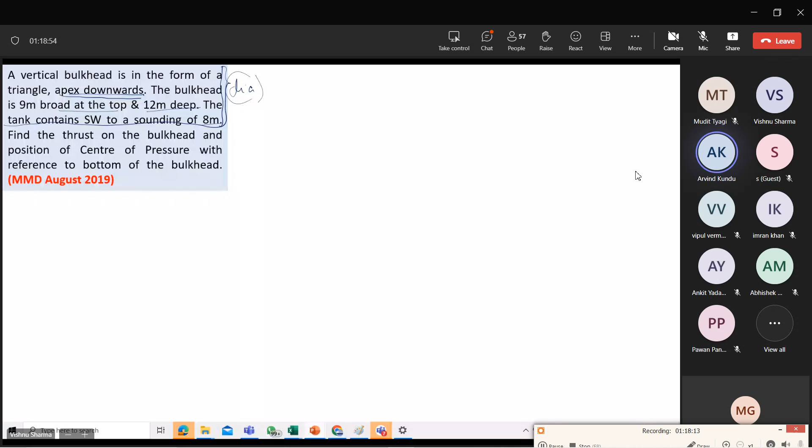Okay, I'm quietly drawing it. If you don't agree with me, I'll not explain anything. I'll explain only if there are questions on that.

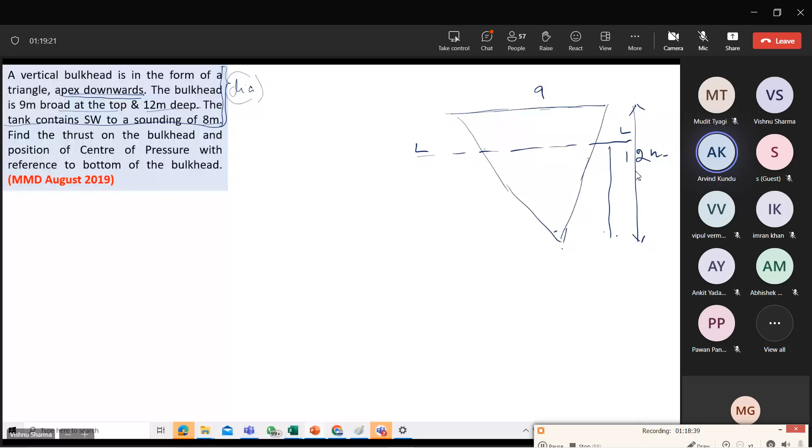Is that correct, guys? Yes, sir, yes, sir. Anybody who has any doubts as far as the thing is concerned, right? Anybody has any doubts on the diagram, beta? Any clarification required? Let's deal with step by step.

Okay, now beta, if I have to get the immersed area, which is triangular in shape, I'm marking it in red here. I need to know its base and height. Okay, height I know, 8 meters. I need to calculate this base x. Yes or no, beta? Correct, guys?

Yes or no? Yes, sir. How do I get x? I have two triangles, one big triangle, other is small triangle. They are similar triangles. Why are they similar? Because this angle is common to them. This angle is equal to this one, this one is equal to this one.

They are corresponding angles of parallel lines, so the triangles are similar by angle property. Whenever the triangles are similar, guys, the ratio of the corresponding sides - there's an important word, corresponding - and the corresponding heights is same. So ratio of corresponding sides, corresponding heights, the ratio is same.

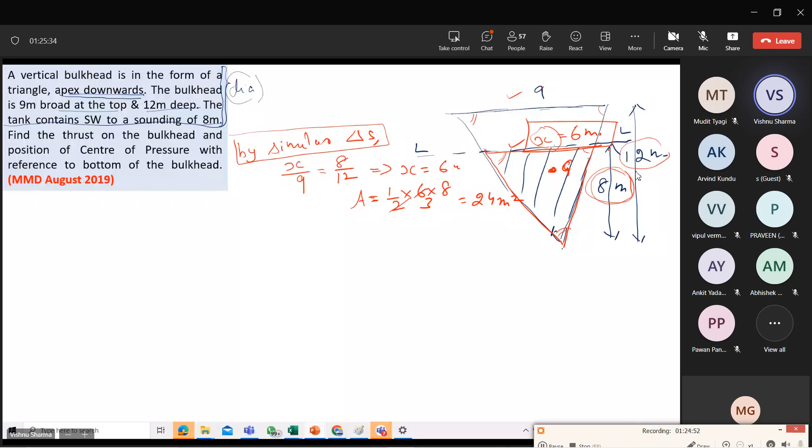Can you tell me what will be the distance of this G from the liquid level? I'm not interested from top, I'm only talking about DLL. What will be DLL? The 1/3 H. Why? So what is H? Look at the diagram, H is, tell me. 8 meters. He says 8/3 meters.

Does everybody agree? Okay no, so 2/3 of the 8? Yes sir, yes sir. No beta, 2/3 from the vertex, beta. I told you that time also, be careful. When I was explaining, I warned you then also. It's 1/3 from base and 2/3 from vertex.

So x is the base of the chota triangle, it's not the vertex. Vertex is this one. Yes or no? Yes, yes sir. This is the vertex, beta. Right? Yes sir. So does that answer the question? DLL is 8/3, so DLL is 8/3.

Guys, look at the formula for triangle. So first, let's get the thrust also. Okay, let's get the thrust first. So thrust will be equal to pressure at the CG, that is depth 8/3, density seawater into area 24. So many tons is the thrust. The answer is 65.6 tons.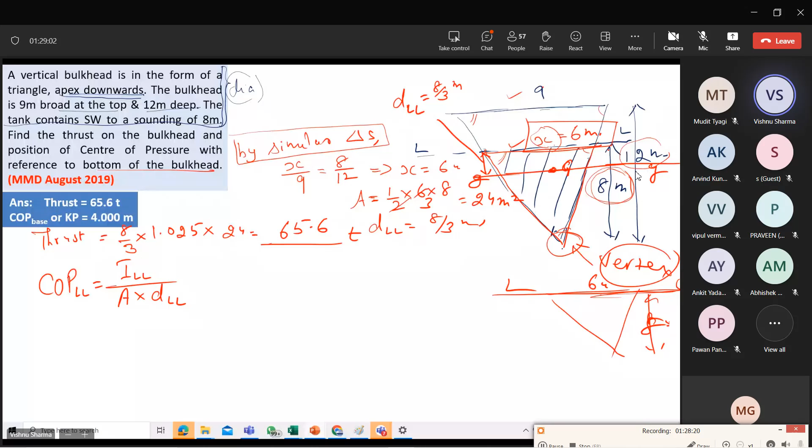Yes sir, if you use GG, you'll have to use the theorem of parallel axis. You'll eat more time, you'll get the answer through that also, because that formula is derived through this use of parallel axis only. But what I'm saying is, if you know that second formula, you can cut short straight away. Yes or no, beta?

Yes, sir, one second. Half the students are lost again, they are getting confused somewhere.

Guys, if you see this one, in this one, what is YY? Is it not about the base? And what is the formula about YY? BD cube by 12. In our case, the triangle is like this. How does it change? Does it change anything?

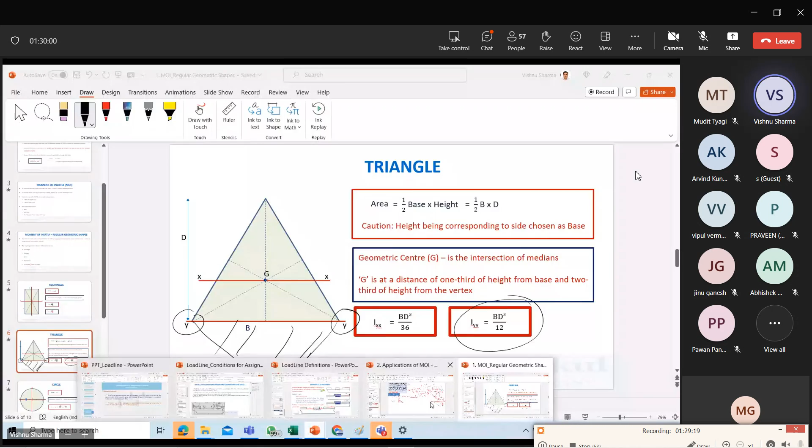No sir, our triangle is like this. Yes, the base will still remain base, yes or no? Correct, so base will still remain base. I can do it by theorem of parallel axis also if you want, that's not an issue, but it will be unnecessary waste of time. So ILL will be equal to BD cube upon 12.

What is base? Tell me what is base in our question. Value of base? 6. What is D? 8. D cube, 8 cube. Not ILL, depth, capital D, beta. BD cube by 12, 8 cube. This is ILL, have you understood? This is ILL, correct beta?

Divided by area of 24 square meters, into D LL of 8 by 3. And this will give you COP LL. This will give you the answer of 4 meters here from liquid level.

Calculate and see, if you are not satisfied let me know, I'll clear the board and do it again. Then COP from base will be equal to sounding minus COP LL, which is 8 minus 4, again the answer is 4 meters. But this 4 came from liquid level, not from base. Incidentally both are same, it should not happen that you get confused again.

Sir, one formula thing gave from liquid level. Yes, tell me. Sir, I took 2 by 3 while calculating. I did it from the base only sir, I used 2 by 3, so that is wrong.

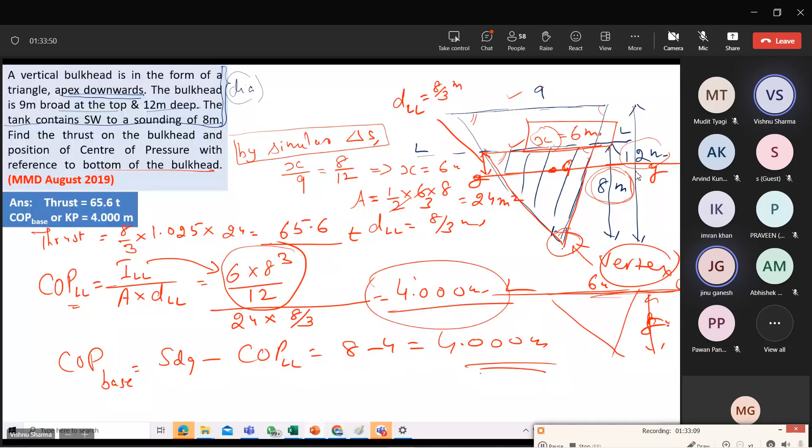We are asked about theorem of parallel axis, that formula which we have derived. Let me just take you to the previous sheet, let me take you to the next one here. This theorem of parallel axis is what has been used.

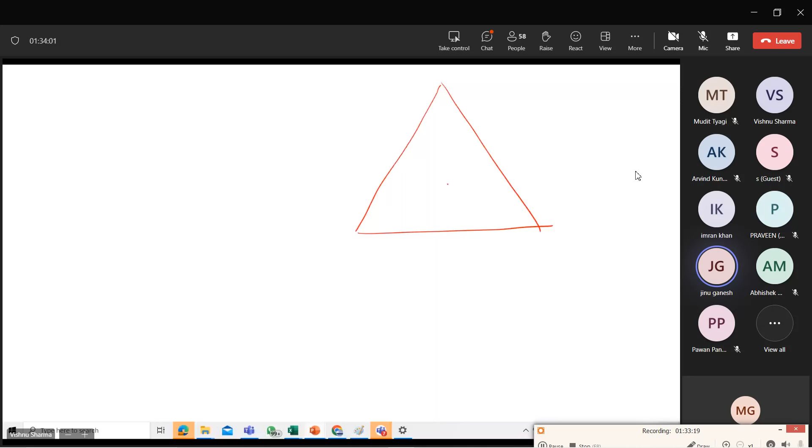I'll tell you. This is GG. This is B. This is D. And we are trying to get about YY. This distance will be D by 3. I'm sure you agree with this, Imran, yes or no?

Yes, correct, sir. Okay. So IYY by theorem of parallel axis, this formula BD cube by 12 has been obtained by theorem of parallel axis only. I'm saying if you learn it, you can skip that step. No, sir, I know that doubt. My doubt is clear for that.

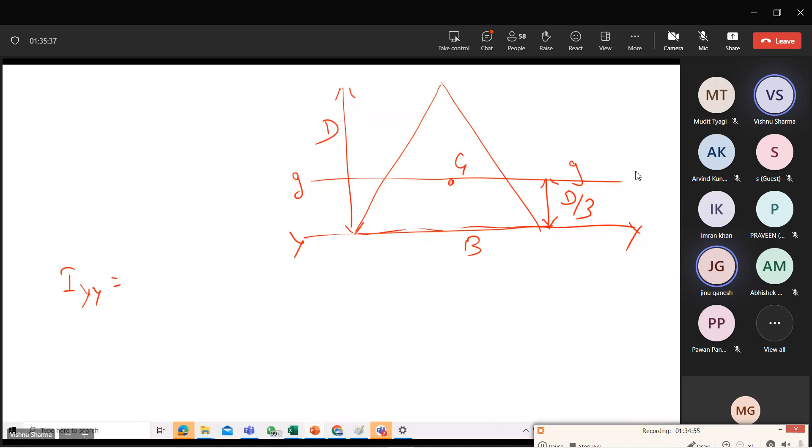Number 2, coming to answering your question as to how can you identify - you can identify by basically seeing whether the formula that you know, does your liquid level fit into any of those given cases? Yes or no? Yes, sir.

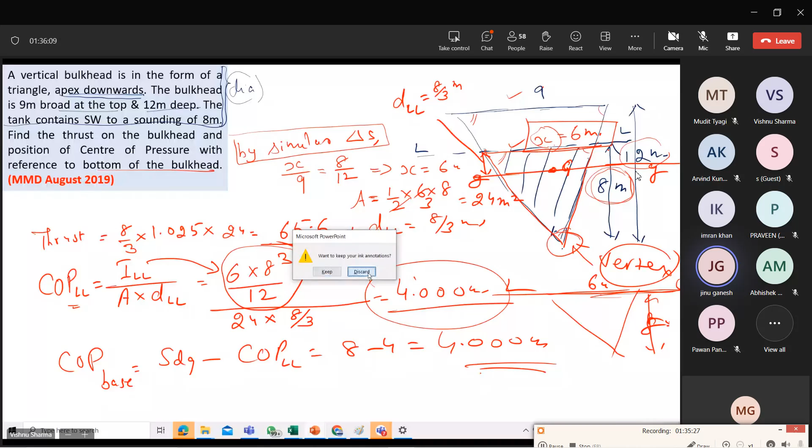Now, in this case, guys, can I clear this and explain to him this question? Is the working part clear? The calculation part? Yes, sir. Okay, sir, I'll clear this and then explain to him the issue.

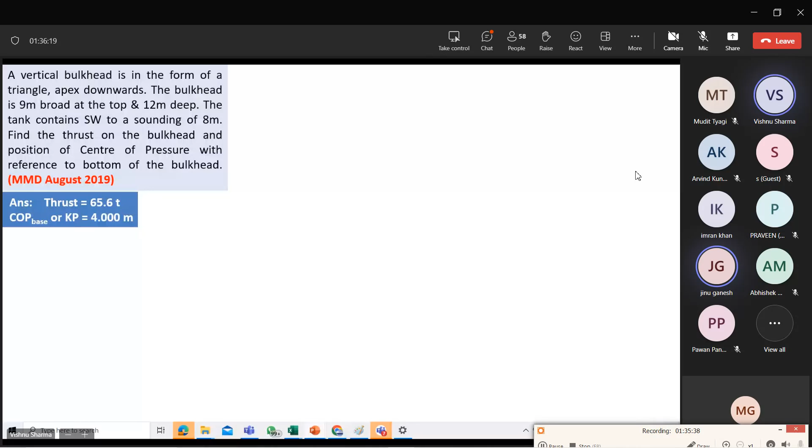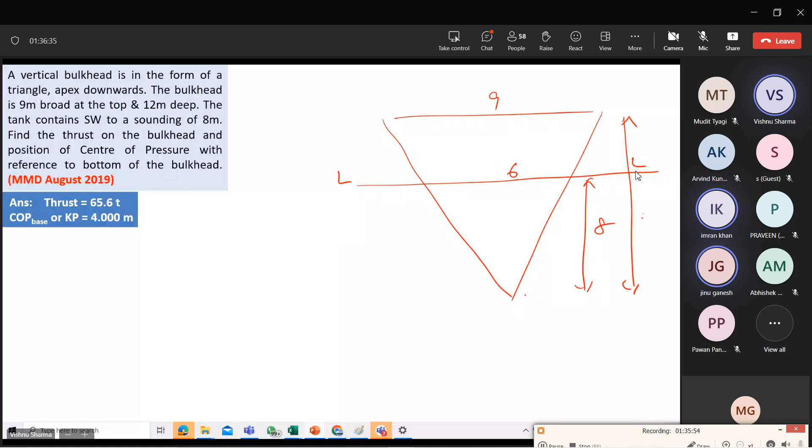See, Imran, it's very simple, nothing to worry about. See, it was like this. If you want, I can do it by theorem of parallel axis also now. This was our case, 6 meters. This came as 8. This was 9 and this was 12. This is what we have. And this was the area of interest now - the area above the liquid level is of no interest to us. Correct, Imran? Correct, sir.

Now you see this diagram without anything cluttering it. You want ILL of the shaded area, yes or no? Correct, sir. What is the shape of the shaded area? It's a triangle. Is liquid level coinciding with the base? Yes. So if I want, I can use that formula. Correct? Yes, sir. If you don't want to use it, let me also do it by theorem of parallel axis - you'll get the same answer.

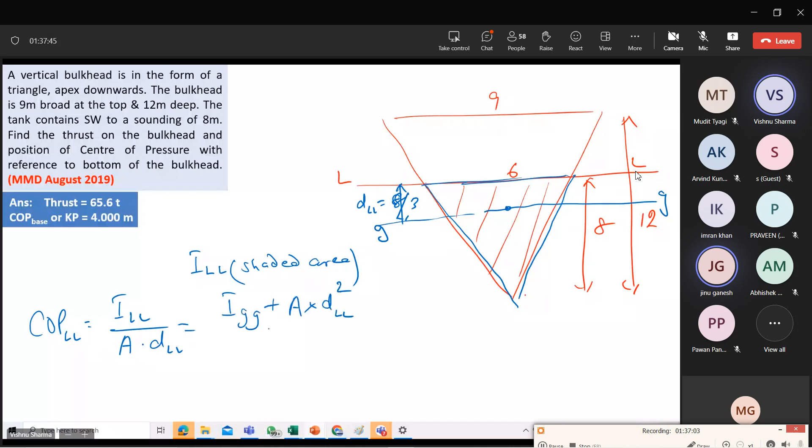GG. This is DLL, 8 by 3. Correct. So you see, COPLL will be equal to ILL upon A into DLL. ILL will be equal to IGG plus area into DLL square upon A into DLL.

IGG will be BD cube upon 36. B is 6, D is 8, 8 cube upon 36. This is IGG, do you agree with it, Imran? Yes, sir. Area is 24. 24 into DLL is 8 by 3 whole square divided by area of 24 into 8 by 3. If you solve this, it will again come 4 meters, you can solve and check.

So if you have a doubt, firstly there should not be doubt, but if you have a doubt, you can go back to theorem of parallel axis, go to basics, no problem. That was just to save time, nothing else. Understood? Copied, sir. So if you are clear that you can take a shortcut, take a shortcut. If you are doubtful whether the shortcut applies or not, don't worry, go to the basics - it will take another couple of minutes, that's all it will do, nothing else. Okay, beta?

Guys, so far so good. Copy?